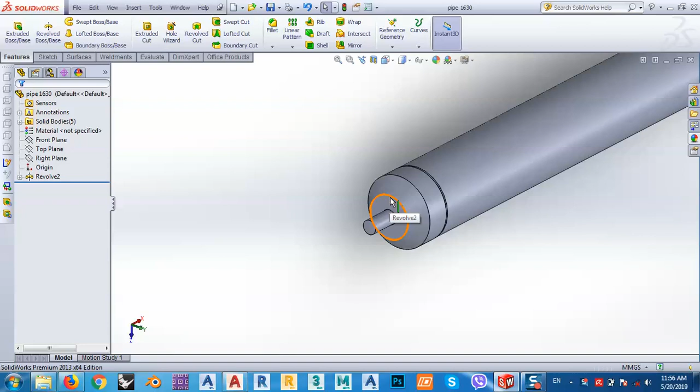Go to Sketch and choose the polygon. I want to sketch here, or you can select here, make it normal, and use the sketch from this side or another side - it's the same thing. We can select this face and go to Sketch.

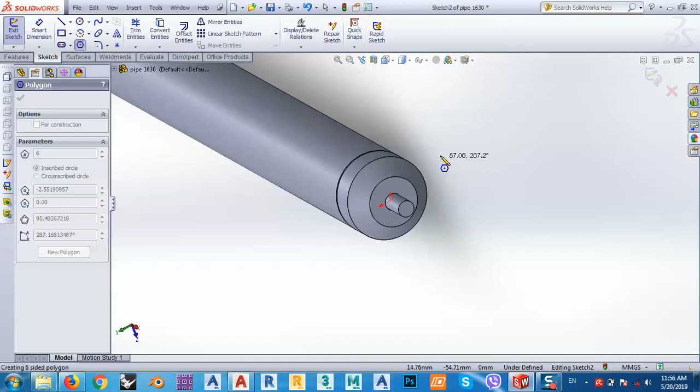After that we can click here and from the center bring it outside. Here the number of sides is here, the point is here, the diameter - we can choose whatever we want.

For example, we want to choose the diameter. As we know, we have this one at 16. So if we say 22, let's see - it's up to your spanner. If there's 22, or another value like 27, 30, it's as you want. So just click close dialog.

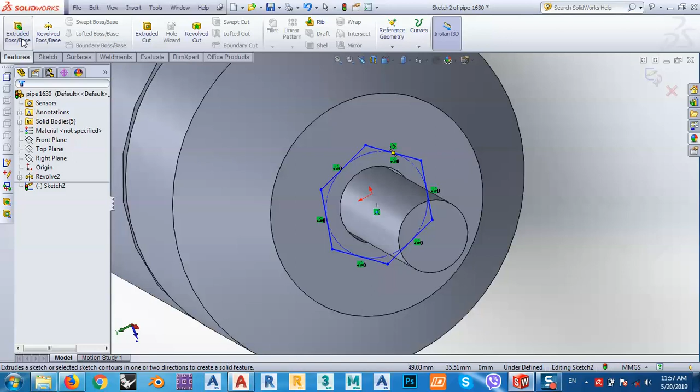We have this sketch now, but I don't want a sketch - I want it to be a 3D model, so I can go to Extrude. Let's say we have 30 millimeters or maybe less. Okay, 20 maybe - yes, why not? 20 or 30, 25, whatever we want.

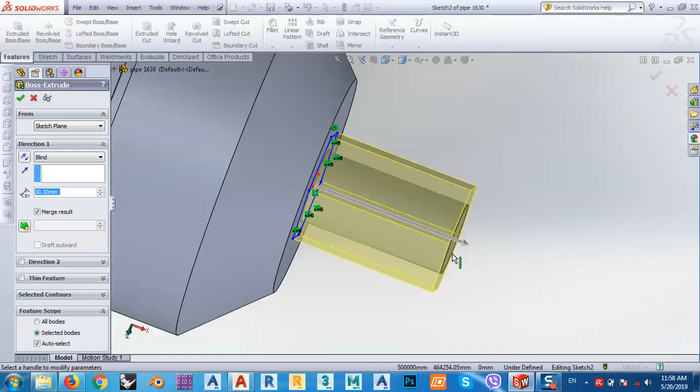Of course we have to make this one a little bit taller - I mean the bolt. But no problem. By the way, I don't want this merged with this body, so I'll remove this one. Just click OK - that's very good.

I could make this one for another time, another side - oh, I don't have it, so I'll solve it. No problem, I'll copy this one.

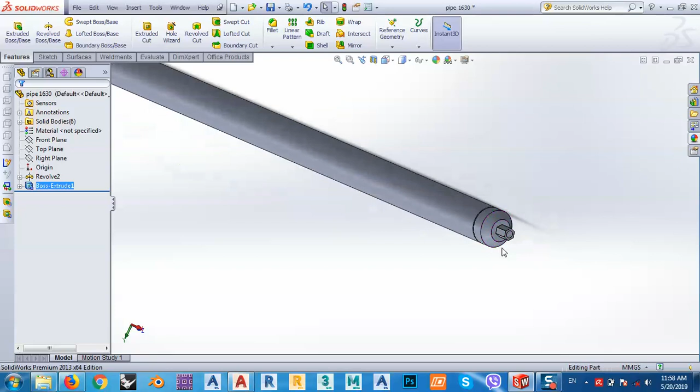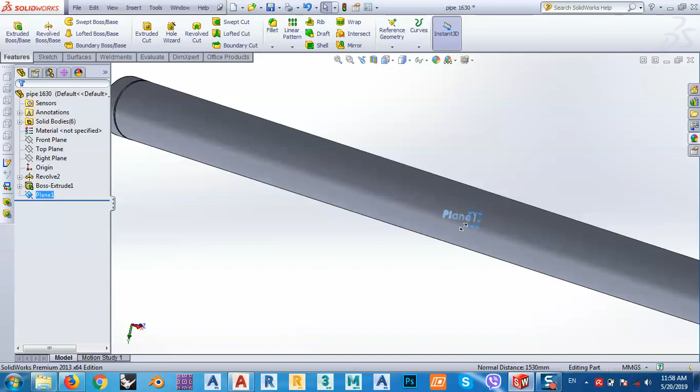To copy this one to the center line of this pipe, I have to first make a geometry plane. So for the plane, the first reference is this one, and the next reference is the other side. This way I could get a plane in between these two. Just select plane and make it a little bit larger.

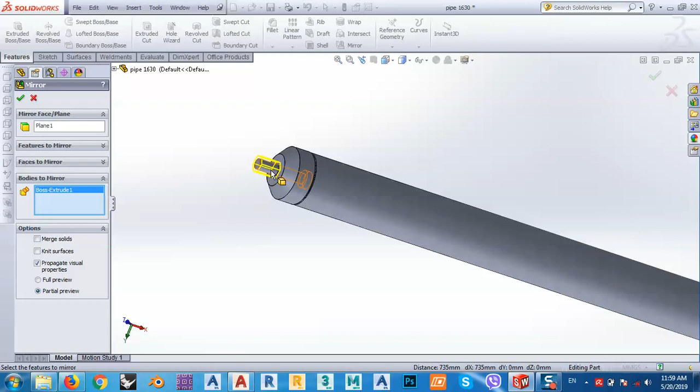Anyhow, I want to make a mirror, so mirror for 3D elements. This one is the face of the mirror, or the plane of mirror, and this is the body. I want this body. Let me see - oh yeah, that's very good. Just click OK, so I could get this type of pipe.

So I have pipe 1630 - just save it. By the way, I saved this file before, no problem. After that I can do Save As, and this time I want to name it 1462. Just save this one.

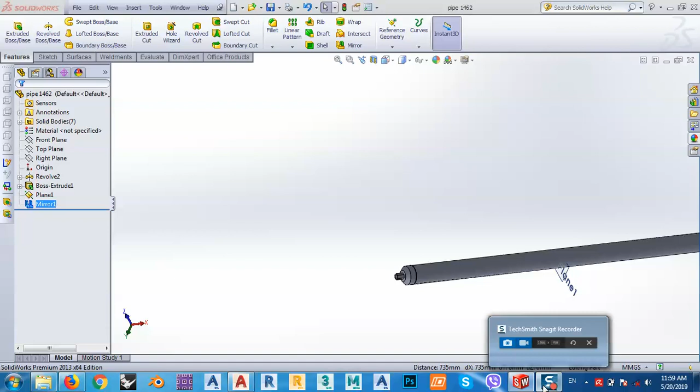So it's pretty easy to change this one, just by selecting it and going to edit sketch. We can go to top view so it's more clear. You see the dimensions that we used before - what are those dimensions we used before?

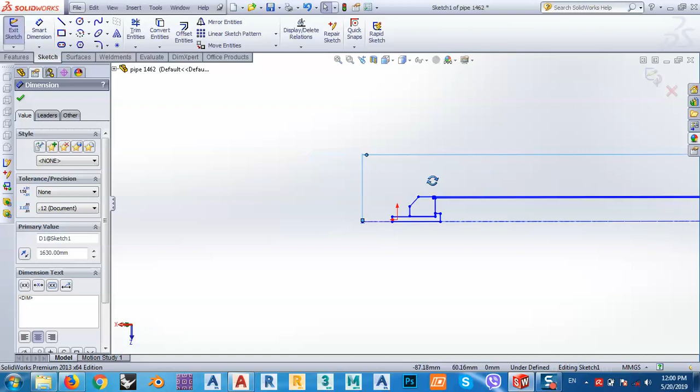Like, for example, this one - from top view, these dimensions. Now I'll change this dimension to what I have. You see everything changed with its parameters, because all of these things are fully parametric.

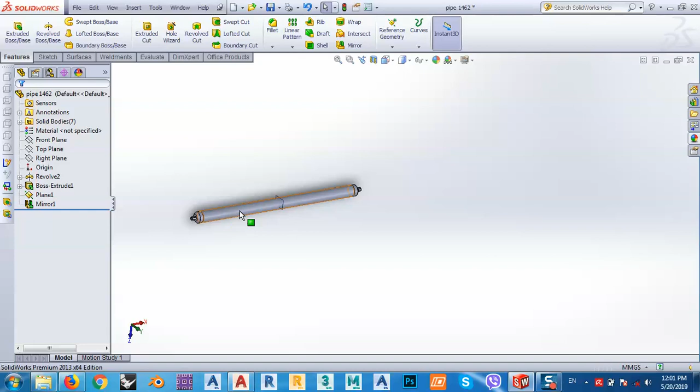So just by clicking this one, I can now get lines, or a 3D model for a pipe like this - just what I want. I want to save this pipe also, so that's very good. I could get pipes, and again I want to make a new part.

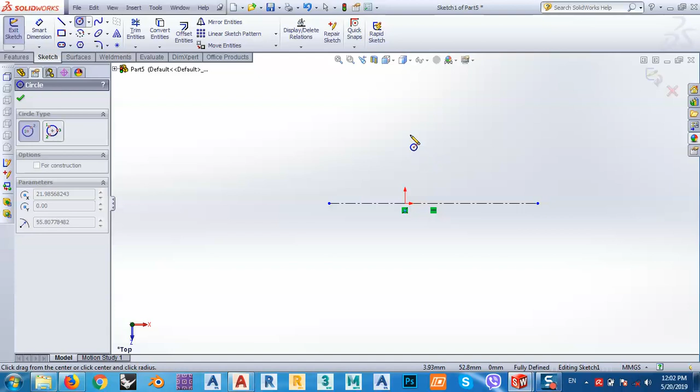This time I want to make a ball - the nodal connection. So from here, for this one, what I want to make is what I have - we can make a line which is, let's say, a construction line, and after that from the center we can make a circle and give it a smart dimension.

As you see, this is the diameter, let's say 110, okay, or 100 as you want. After that, just escape and trim entity.

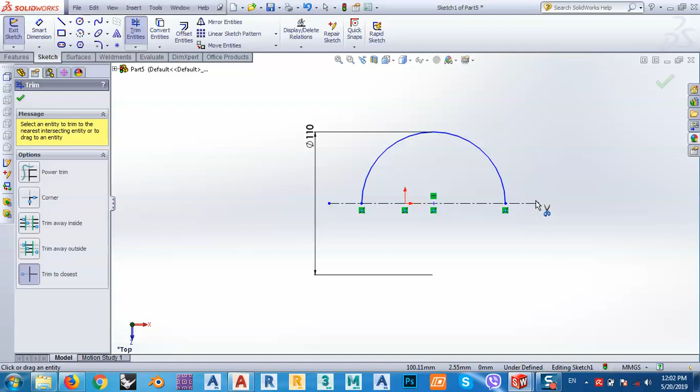I want to trim this one, and I want to revolve this also, so I will give it the dimensions from here. I can delete this one, no problem. I can give it a dimension, smart dimension, just like this. R is 55, is okay.

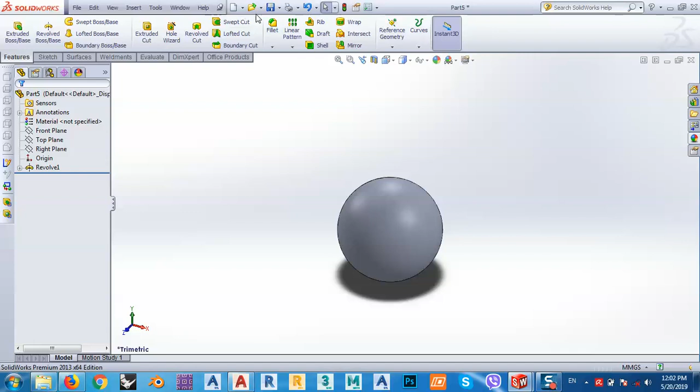So again, we can go to features, revolve. Yes, as you see, now it's like this, and just click finish. So we have the ball connection. Save this part as a ball connection.

Connection. Save. Okay, that's very good.

The last thing that I want to show you to make the grid, as I said before, we have to make 3D lines to make our grids. Let's name it as grid. So okay, just go to open and open 3D lines, and it will open this one.

Import to a new part as a 3D sketch or model. So just next. By the way, you have to select this one, okay? Next, and the unit is millimeters. My drawing's unit is millimeters. So just I want to finish this one.

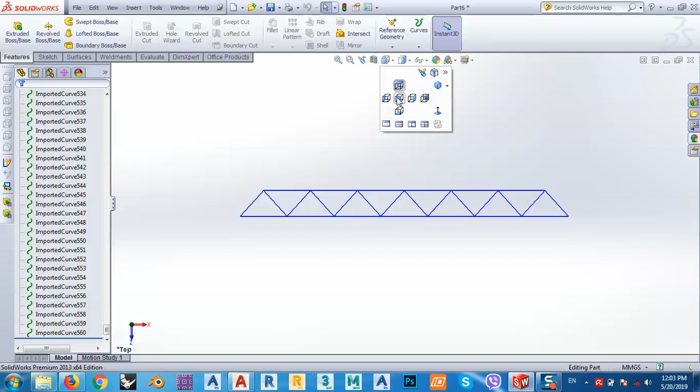So it's very good. Now I have these entities. I can go to top view to see this. By the way, this is the top view, but I want to change it. The view like this. Let's say I want this view to be top view.

So right click and go down and save current view as top view. So I want to change my UCS. Anyhow, I'm sorry. Make a 3D sketch. Okay, as you see, we could make a 3D sketch.

After that, I want to select these lines. Let's see how many lines I have. Press Shift key and first select the first one, and convert entities. Okay, so I could convert everything. Now I have a 3D sketch.

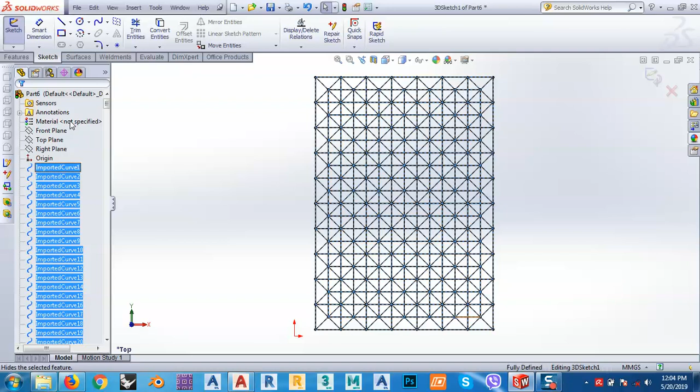So let me hide this. helper lines, and hide them. I want to hide these helper lines to see my 3D sketch.

As you see now, I have this 3D sketch, and I can get the things that I have. Okay, by the way, I can save this file. Let's say space frame grid. Save. So now I have everything.

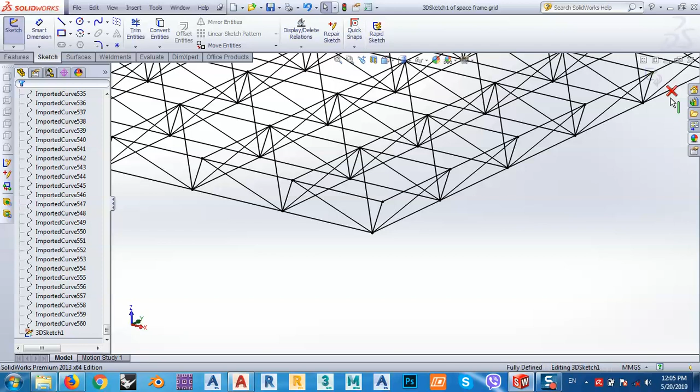Just let me go back and close this one. Now there's the last thing that I want to show you, which is the assembly of the parts. I can go to open. I'm sorry, I have to make a new part, and here from assembly, just click OK, and from here browse.

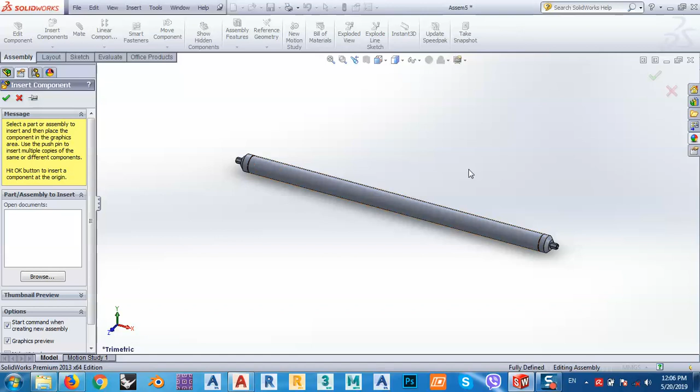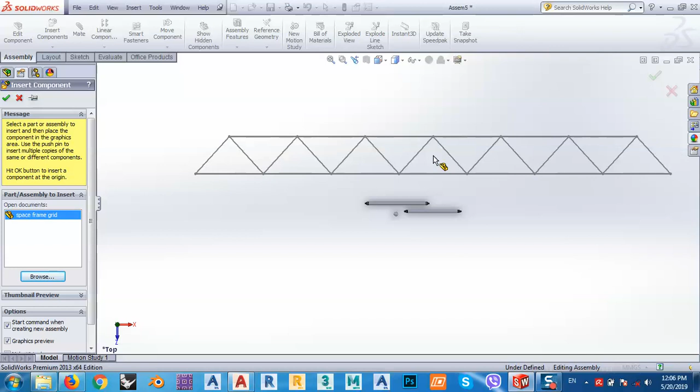Which pipe here? This is the name of the pipe. So insert component, I have to bring this one, this one also. This is the ball, this another pipe, and this is the grid. Okay.

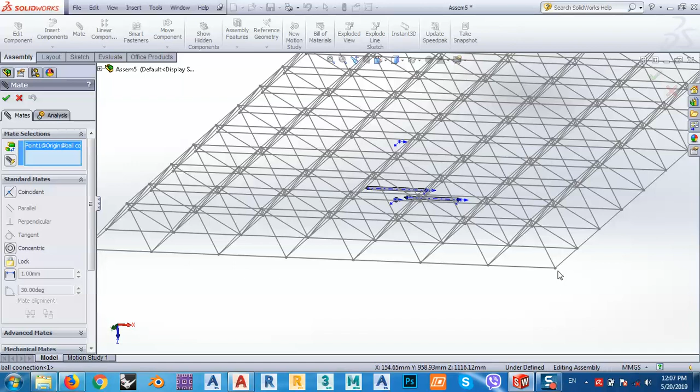Let me make this ball. But you see, I want the center line. This point, this center line, and maybe this point also. I want to bring them anyhow. So from this point to like this point, and close. I have some problem with this part, I think, but I will solve it, no problem.

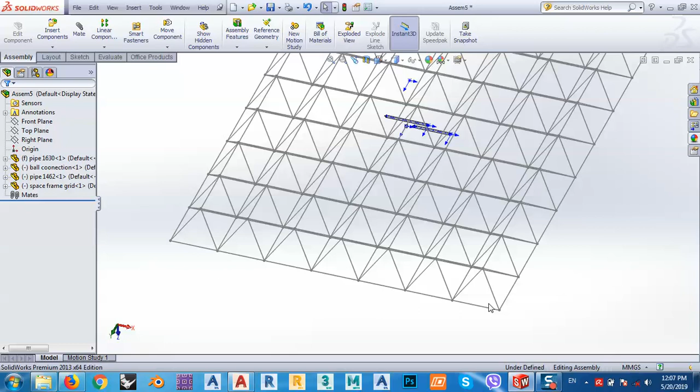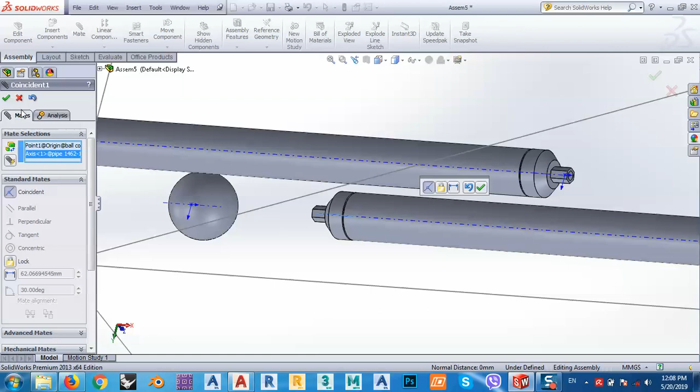So let me just stop here, so as not to make the video too long. After that, from the third part, I want to talk in detail about how we can make these parts. As you see, we can make this part, let's say from this point, made from this point with the origin to some point from here. It's easy, we can use distances, we can use anything that we can make, but I don't want to rush through this because this is the tricky point. So that's why I will discuss it in the third part of my course. So thank you very much.